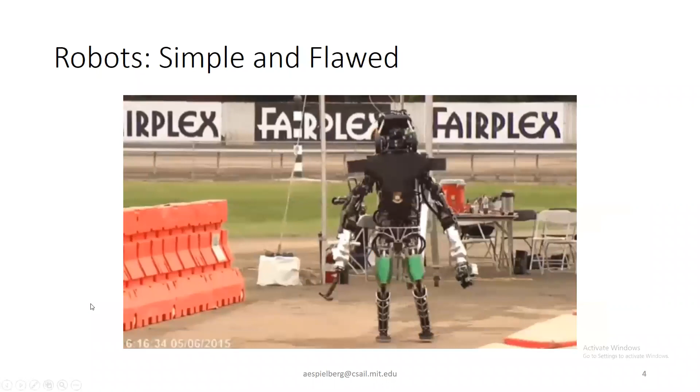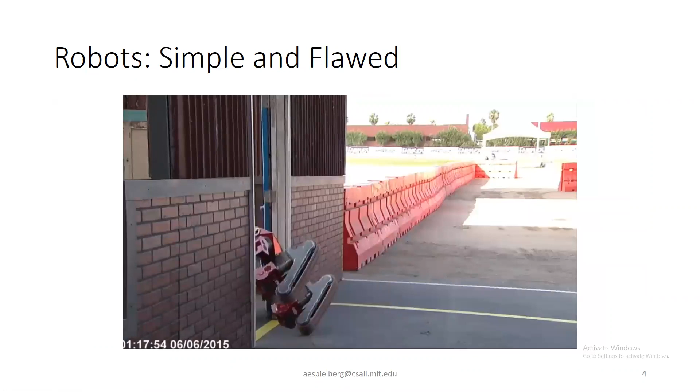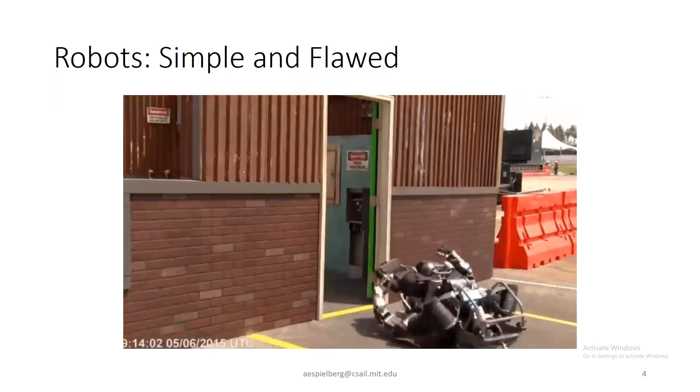This has been described as a cheap shot by some, but by comparison, the state of the art a few years ago is the DARPA Robotics Challenge. Obviously we've made some strides since then, but the robots you saw there, even though they were extremely capable, more capable than other robots before, still failed in a lot of ways. Part of the reason why they're lacking robustness and why they're not as agile compared to organisms in nature is because of the structure of these robots.

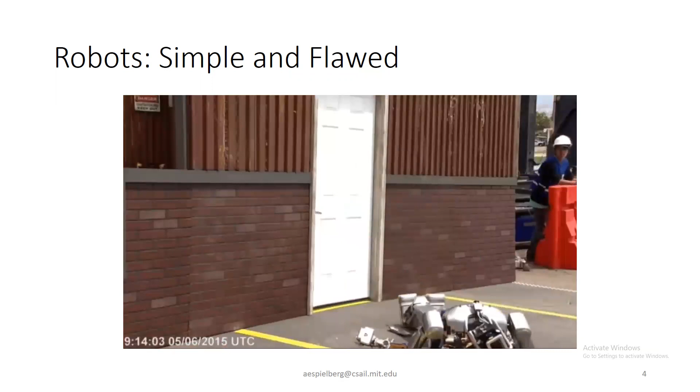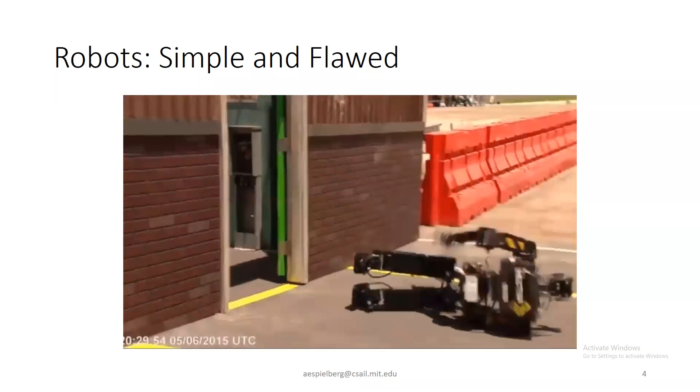They're not complex, they're rigid components, there's not a lot of sensing on them, the actuators probably leave a lot to be desired. If you look at all these robots, you're going to see a ton of different bipeds, but they're all really similar, and they're all suboptimal, I would say. We haven't nailed what is the perfect biped for robots, because that's a really hard design problem — they're going to be really complicated.

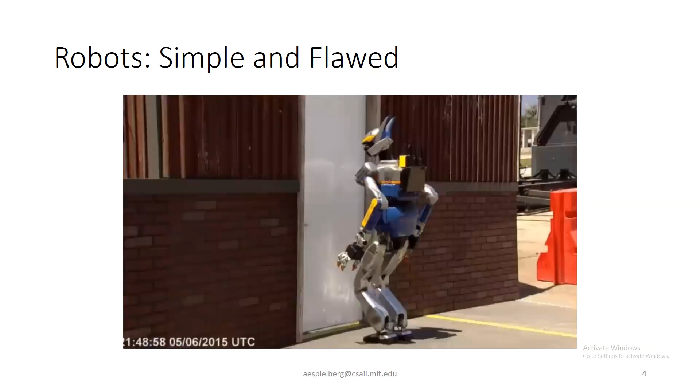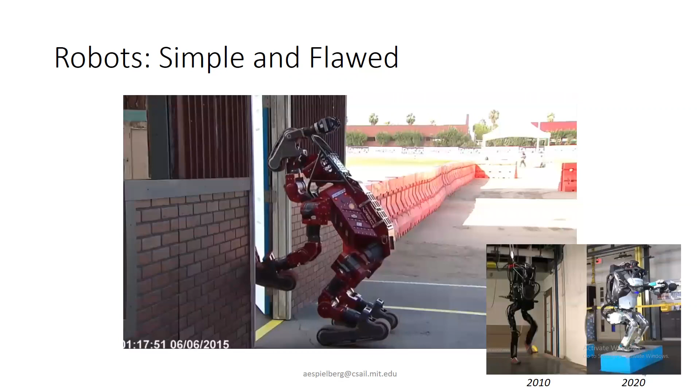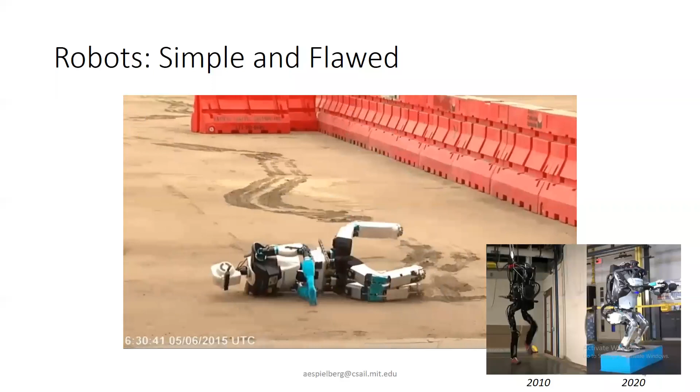But we have made a lot of strides. On the bottom right here, this is Atlas, one of the bipedal robots from Boston Dynamics in 2010, and the version you see in 2020, which we've seen can do parkour and backflips and all sorts of cool stuff — that's huge progress. But on the converse side, it took 10 years to get from where you see in 2010 to 2020, and the robots still can't do a ton of tasks that we'd want our humanoid robots to do.

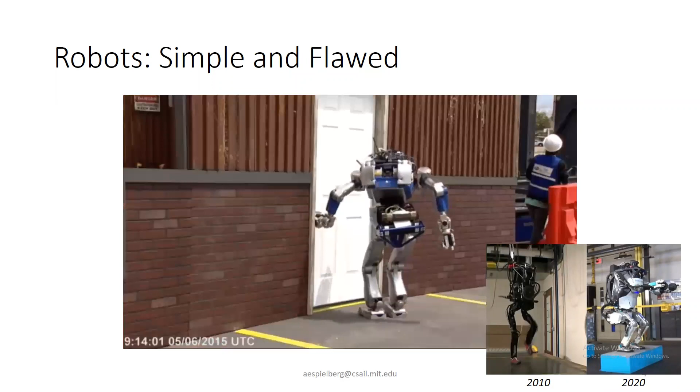If it's going to take 10 years to get there, I'm wondering how many more decades it's going to take for us to get to the super capable robots that we want, working in our households or working beside us. And that's just for humanoids.

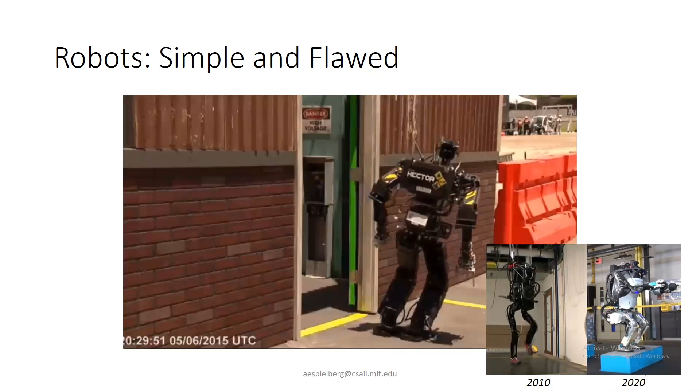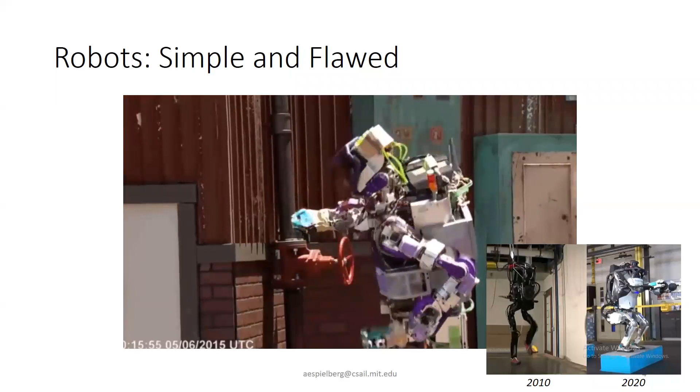If you want a real diverse array of robots, we're going to need much faster ways to design and fabricate these robots. These current workflows, while making great strides, are not fast enough if we really want to explore what's capable.

That leads to the main thesis of this talk: if we want capable robots, we need to make it easier to explore both algorithmically—that is, purely by computer design—and manually. That's where a human is working side by side with the computer in order to solve tasks, in order to design the robots.

I'd like to ground this for a second with a quick example. On the left-hand side, these are robots that have been designed completely by a computer for a task. The topology and the controller have both been co-designed together for all these robots in order to allow them to walk forward. I'll show more examples of this later.

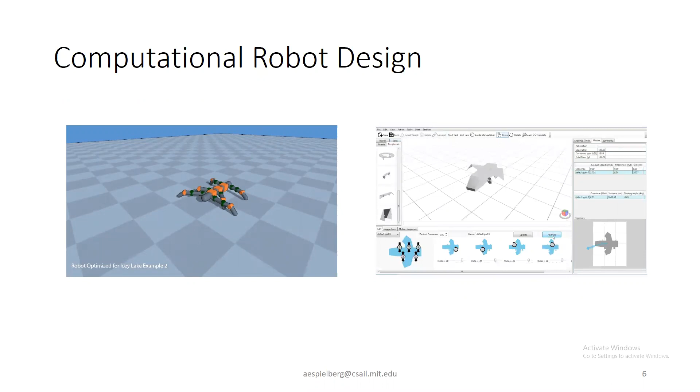On the other side of things, you can also have workflows where humans work side by side in CAD-like programs, where the system helps users assemble robots—resizing components as necessary to fit constraints. The system can also guide the user interactively, suggesting how to change different parameters to make them optimal for certain tasks, such as walking forward, conserving energy, or turning in place very well.

So these are two workflows that are really going to enable better, faster design of robots in the future.

The world of robot design is huge, and it's growing faster and faster. The reason why it's huge is because every robot has two parts: the brain and the body. These two work very closely together, and there's some overlap, but for discussion's sake, the brain includes control, sensing, proprioception, sensory motor skills, and the body is about the structure—the topology of the robot, the shape, the materiality, and so on.

There's also a spectrum of different types of robots we'd want to design. There's the traditional rigid robots, which I've mostly shown so far, but there are also soft robots—continuum bodies that move in very high dimensional ways. And then there's a spectrum in between, as we'll talk about at one point in this talk, where we have some rigidness and some softness.

This is actually a very difficult problem, but these different components are needed for different types of robots. Depending on the rigidness, softness, or type of task you're trying to solve, you might need certain components optimized, and for other types of robots you might need other components optimized.

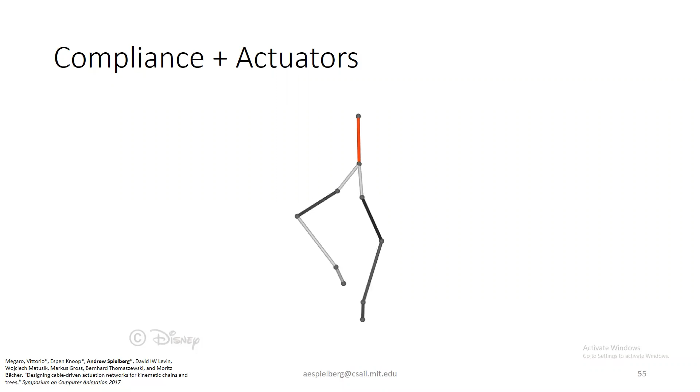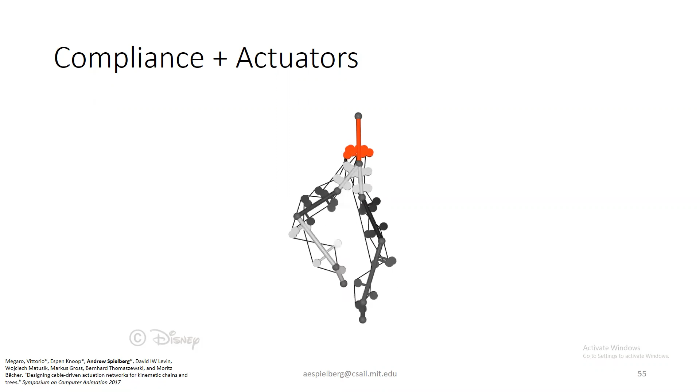So you have to input some target poses, and then you have as candidates a large selection of different possible cables you could use to actuate the system. This is tons of cables, like 4,000 cables, in order to hit those poses. We need an algorithm for down-selecting the most relevant ones in order to hit the poses as accurately as possible. This is a co-optimization problem because we also want to solve for how we pull on the different cables to hit the certain poses.

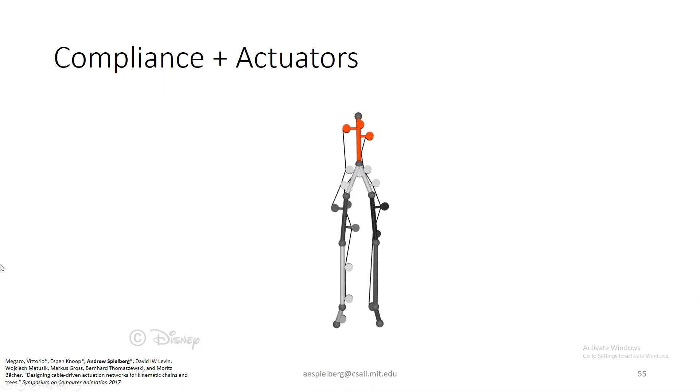I want to jump forward to some more examples. This is the fighter character you just saw, but we can also do things that are maybe a bit more interesting for robotics.

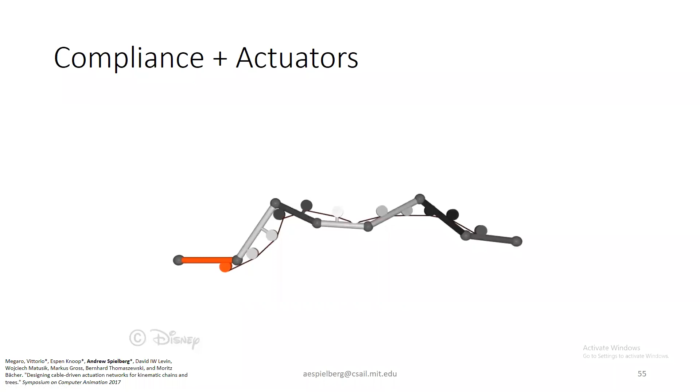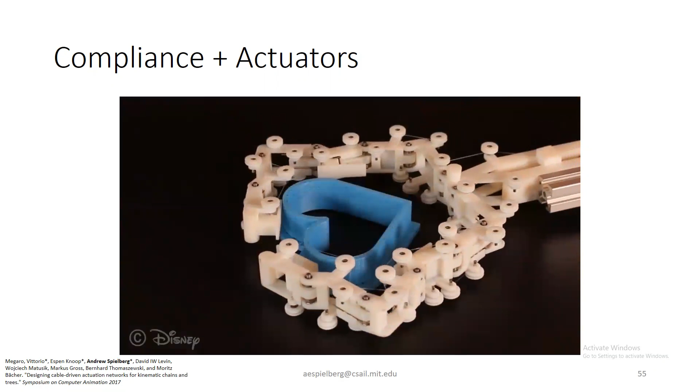So we have this gripper, and this is a gripper that needs to be able to hit different poses for different shapes that it wants to grasp. Depending on the objects we expect it to be able to grasp, we can optimize the motion and the task. This might be interesting and useful for industrial robotics, where you're constantly trying to grasp similar shaped parts, and how can we optimize and simplify the design of that.

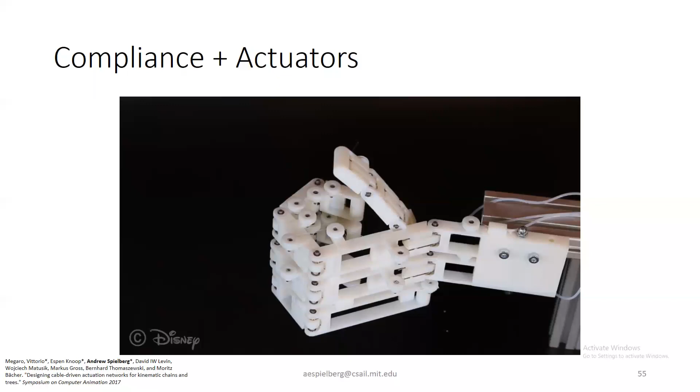We can also do different gestures with a humanoid hand. We give it input poses that we want the hand to hit, and it outputs how we should route the cables in order to do that, and how we should pull on the cables.

One of the things you might notice is that cable selection is a complex problem because it's a discrete problem. Here we're mixing a discrete optimization of where we put the cables with what are the actuation signals that we want to put in order to actually achieve the motions that we want.

This is a one-time trick that we can sort of use. The system is always in static equilibrium, and we always want to hit certain target poses. We sample a huge collection of possible different cables. This allows us to pre-compute all the different moment arms of all the different cables with respect to the torques and the joints that they're going to move.

That allows us to build this really dense H matrix. In static equilibrium, you have an equation which is the moment arm times the force applied on the cable is equal to the torque. So we can build up this really large linear system, and if you can solve it, then you're in static equilibrium. So all these poses are in equilibrium.

Then we can come up with the following dualism: we realize that a force that is 0 is the same thing as having no cable at all. So we can run a sparse minimization process, sort of like the lasso from statistics, and co-optimize over minimizing the number of forces and cables we need, and also the forces themselves that we need to pull on the resulting cables with.

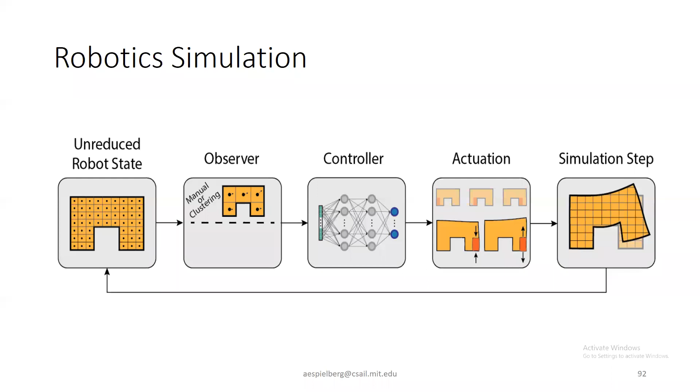Going back to soft robotics, there's a question of whether machine learning can help design capable soft robots. If you recall, I showed you this figure earlier, and one thing I skipped over is this observer function. Whenever you're dealing with soft robots, they're infinite dimensional creatures, so we need some way to reduce this high dimensional state down to a low dimensional state that can be fed into a controller. If you try to feed the entire state, even approximating an infinite dimensional system as tens of thousands of dimensions, it's very hard to actually learn. It's very slow, and sometimes it gets stuck in really bad local minima.

The way we did this in ChainQueen is we manually created an observer function where we clustered different parts of the robots together, computed their center of position and center of velocity for each one, and fed this into a controller that we learned over time. This requires some human tweaking, and you can't actually measure in real life where every particle is on a system.

So we have this idea that maybe we can learn to control these soft robots from vision. We have an optimization scheme, which we call learning in the loop optimization, where we interleave learning the structure of the robots, the structure of the observer, with optimizing the robot's controller and materials.

The way we do this is we alternate learning an autoencoder. This is really nice and easy because the material point method occurs on a grid, so we can use a convolutional neural network to learn from the grid states, those intermediate grid states I talked about, from the data that we generate in simulation.

During simulation, we generate lots of data of different grid states. The data in these grid states is the velocity of the robot, both in X and Y, at every one of these pixels. That's actually physically measurable, because it's something you can get from dense optical flow—you can approximate how fast different parts of your robot are moving.

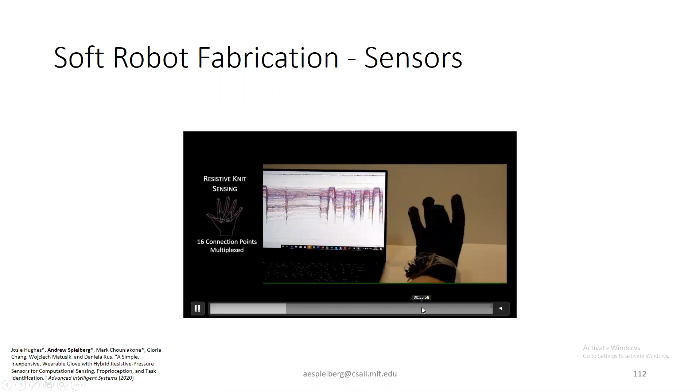Okay, I am extremely low on time, so I just want to quickly talk about some work we're working on in fabrication and user interfaces. One thing we worked on recently is trying to fabricate these sensor arrays. So we came up with this project where we work on making a soft glove that can reconstruct, at least now for hands of people, but hopefully over time they'll be able to reconstruct the structure of robots. And we can get state-of-the-art hand reconstruction using this architecture.

Really quickly, the way that it works is that it has both resistive and pressure-based sensing, and we can use the dense arrays of resistances that we measure from a fully conductive glove, which is knit, in order to get the in-hand pose reconstruction. We also have pressure-based sensors on the front of the glove in order to measure interactions with the world. It's really simple to make. It's purely fiber-based. It costs like $60, and it's all from learning. So we're hoping to use this structure to optimize sort of robot skins.

We can do lots of things with it right now just for human wearables. We can get accurate joint reconstruction. We can measure temperature. We can measure grasping force, handwriting accuracy to 90%, heart rate of the wearer. So it's a really cool sensing architecture, and we're really excited about how it can be used to make robot skins.

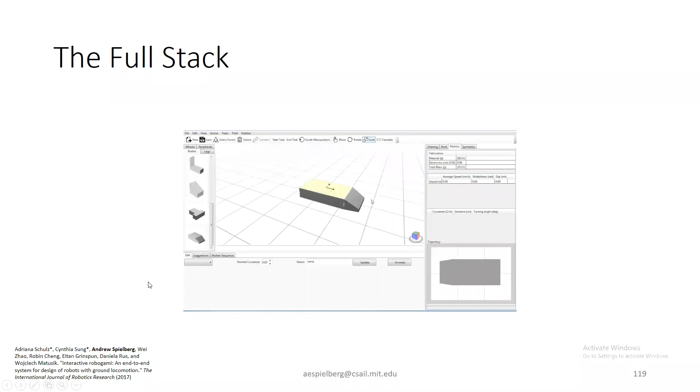And I'm basically out of time, but hopefully the vision here is that in the future, we have these full CAD CAM workflows where you have simulation in the loop, you have the ability for a user to interact, you have the ability to automatically output designs for fabrication, and the system helps guide users in terms of optimizing the different designs according to certain tasks that we want. And hopefully, one day we'll be able to output these directly to digital fabrication devices, such as 3D printers. And we'll be able to create large suites of robots.

These are obviously toys, but right now we're working on trying to make much more dynamic robots like the RoboGrammar robots you saw before. And ideally also, because it's a stack, hopefully we'll be able to swap out different components. So if we decide we want to make metal robots that are water jet as opposed to 3D printed robots, hopefully, going back to the stack idea, we'll be able to swap out any layer that we want and be able to improve, and be able to use all the capabilities below in an intelligent fashion.

Just philosophically, I'm really excited about computational robot design. I think it has the potential to be a force multiplier for the field, because it'll not only accelerate the workflows that we have for design and fabrication, but it'll do so in a way that allows us to explore lots of different robots. So it's going to speed things up for the robots we're already creating, and it's also going to allow us to explore things that we never thought we'd be able to explore before.